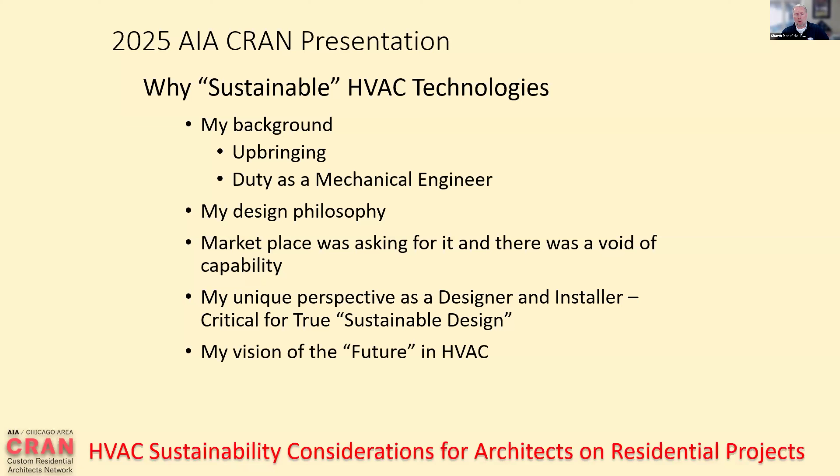I have a pretty unique perspective as a designer and an installer, so it allows me to bring that unique approach to the projects I work on, which I believe is really critical for true sustainable design work. And then I'm always looking to the future and trying to figure out what's coming next and how we can get out in front of those things to ensure that we have the best plan in place, so that when it becomes ready to be applied across a wider berth, we're ready to help apply that.

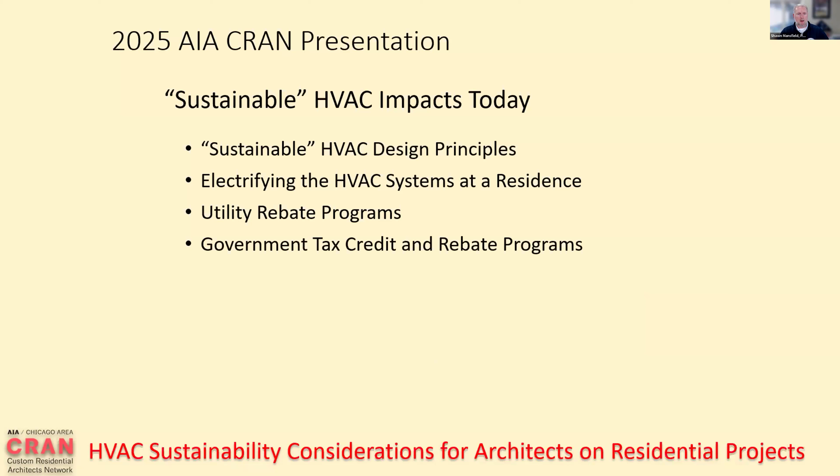So when I think about sustainable HVAC impacts today, some of the items I really think about are the sustainable HVAC design principles, electrifying the HVAC systems at a residence, utility rebate programs, and then the government tax credit and rebate programs that are out there for us to be able to apply to some of those sustainable design principles.

So when you talk about sustainable design principles, we want to work with the architects first and foremost to make sure that we can minimize the loads. We can always throw larger mechanical systems at things, but when it really comes down to truly sustainable, we want to make sure that the parts that I have to mechanically address are as small as possible. Whether that means solar shading, the direction the house points, the quality of the windows, the quality of the insulation, the envelope is a great starting place where we work together with architects to ensure that the sustainable design is as positive as possible.

A lot of energy modeling is being done by all your offices these days. This is nothing new, but how that house points, the overhang of the house, the trees, etc. all go into the amount of solar gain the house takes on, which affects the load that the house has. Next is finding the right approach for the project. Pick the right system for the job. That is important because there's lots of choices out there today, but understanding which one is the right one is very important. Picking the right system for the client. Not every client has the same wants to address the same load. So understanding what that is and how we can assist.

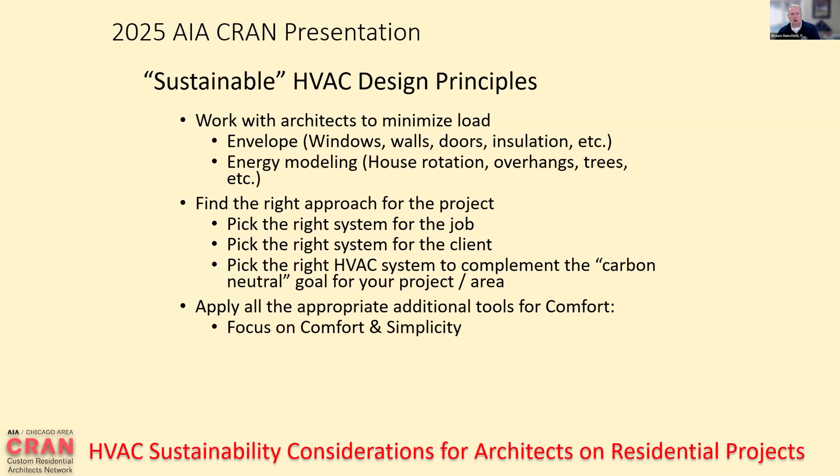Pick the right HVAC system to complement the carbon neutral goal for the project. And then next, apply all the appropriate additional tools for comfort. We've always had a focus on comfort at AA Service. We want to make sure that we're focusing on comfort and simplicity in designs. Those tend to give you longer life expectancies and less overall cost. We want to size the equipment appropriately for the project. You're actually trying to shoot to undersize when it comes to HVAC systems. Bigger is not always better. Most people believe it is, but in the world of HVAC, especially talking sustainable, bigger is not better. And then we want to apply humidification, dehumidification, fresh air and filtration to improve comfort as well.

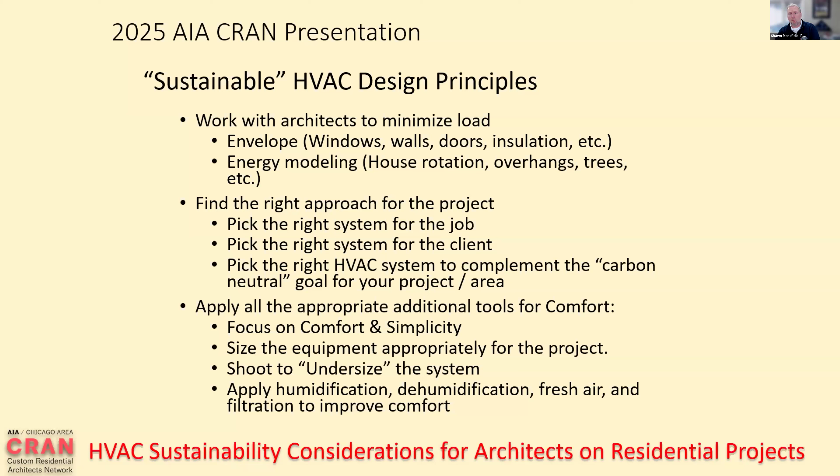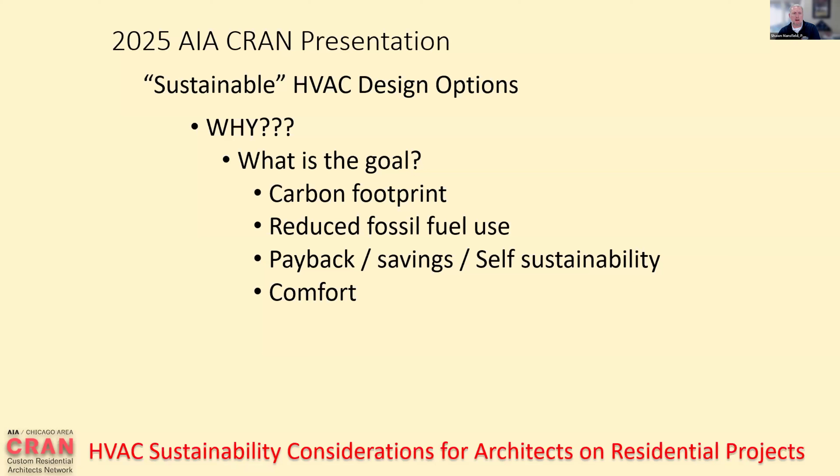So, why are we looking to do a sustainable design is an important question that we always have to ask. The first question to ask is what is the goal? Why are we talking sustainable design on a particular project? Does the customer look to be carbon footprint neutral? Do they just want to reduce fossil fuel usage? Are they just interested in payback, savings, self-sustainability of their systems? Understanding those versus comfort, and which one is most important to a customer, can really help us determine the right sustainable design for a project.

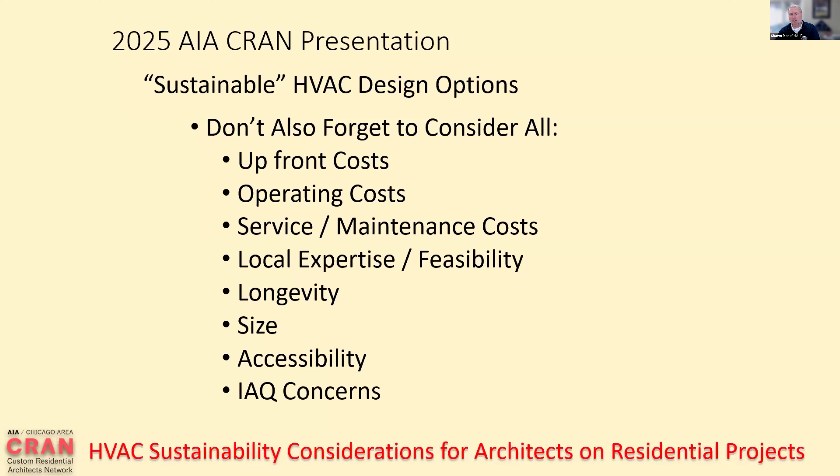But we also don't want to forget to consider all these other items too: the upfront costs, the overall operating costs of those systems, service and maintenance costs, local expertise and feasibility to apply those sustainable designs in a particular area, the longevity of the equipment, the size, shape, and location of the equipment, and the accessibility of that equipment once it's installed. And then finally, do we have IAQ concerns that we need to either figure into the design or create side applications for to address them?

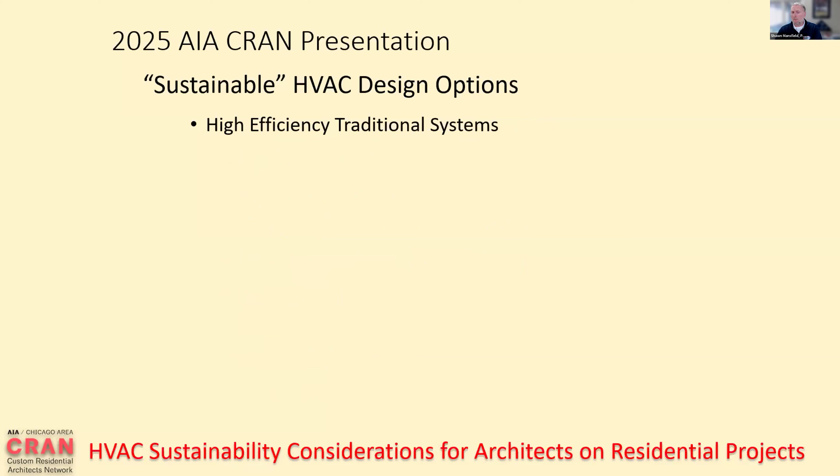There's a lot of different ways that you can apply sustainable designs today on the HVAC marketplace. A traditional way of doing it is a furnace and air conditioner. They certainly have some very high efficiency traditional systems that are out there today. They're kind of your good, better, best. They're going to be your good level starting point for someone looking to do a sustainable design.

There are other ways to heat and cool in our area. Certainly radiant heating systems paired with high efficiency boilers are another great way to create a very sustainable design when it comes to no moving air in the house, that you're just using the radiant floors to heat. But at some point we still need air conditioning. So it tends to be a duplicitous approach where you also have to put air conditioning systems in that are separate from your heating.

A very big way of doing sustainable designs that we've been involved with over the last 10 or 12 years has been air source heat pump systems, variable refrigerant flow systems. These provide for the opportunity to use more electric power to do your heating and cooling than gas.

Certainly geothermal is a key word that's out there that many people recognize. Geothermal systems use the earth itself to be a battery to allow us to store heat from the house for one season, to pull that heat back out from the earth in another season, to try and really minimize the amount of energy that we use. And there's still brand new technology to come. There's always new developments going on in the industry when it comes to the best ways to create new sustainable designs.

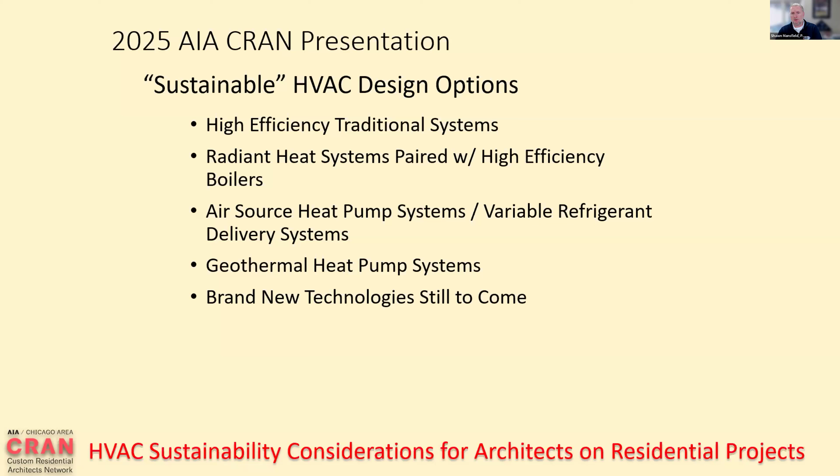So electrifying or hybrid, which one and why? These will be some things that we can talk through during the breakout, the future Q&A session, and just kind of talk through why we choose to do one versus the other. I've got some slides I can share when we get into Q&A in regards to some of these ideas, but there are two different ways that you can go. Many customers today talk about wanting to be able to fully electrify. They want to get completely off the gas out of their house. Those things are great, but there's a lot of things that go into the how when it comes to those applications.

For someone who's looking to just do more than use natural gas, the hybrid systems that are out there today, which use air source heat pumps to do both heating and cooling, the same job the old air conditioner outside used to do, are opportunities for us to come up with a hybrid where, depending on the local utility costs for electric and gas, we figure out that sweet spot where we go from using the electric heat pump back to using the gas. Maybe that's 30 degrees, maybe it's 40 degrees, maybe it's 20 degrees. It's a microeconomics problem for any location where you apply it. You have to figure out the utility cost break where it makes the most sense.

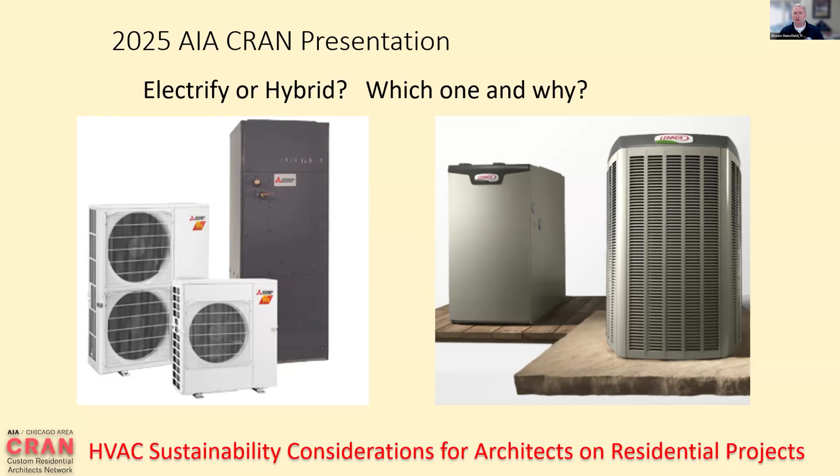But most of the manufacturers today are coming up with software that can help you make that decision and figure out exactly when it's the best place to use one of these. Certainly going to a hybrid is going to be less expensive than going to an all-electric or going to geo. So in a good, better, best, it can give you a lot of the opportunities without a lot of the cost, but certainly doesn't get you to the lowest carbon footprint. Any heat pump approach is a good option for looking to do sustainable design.

Some of the questions that I typically get asked that we can go through later are, how can I go fossil free? How can I get rid of the gas in the house altogether? How do they look and sound? Special considerations for installations when we apply these systems. When do you switch over in an electric or hybrid system? When do I know to go from using gas to using electric or back and forth? Is it automatic? Can it just be set up in the thermostat?

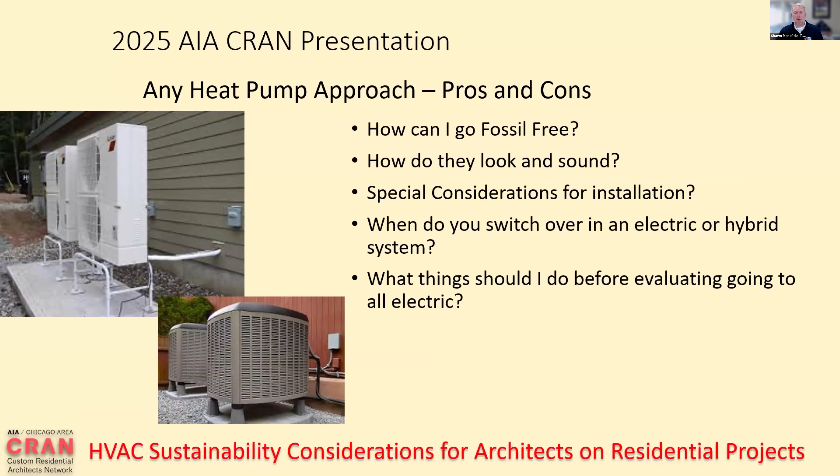What things should I do before evaluating going to all electric? And then also along with all that is understanding the different items that are out there to choose between. For your full electric approach, there are a number of pros and cons. Do I have enough electric panel to support?

That's something that Garrison's going to speak to a little bit during his presentation. Will the air temperature feel different in the house if I go to an all-electric approach? The answer is definitely going to be a little bit, but is it enough to be an issue for most? Probably not. Do I do one large system or a bunch of little systems to replace my existing system? All these things are opportunities that are out there when it comes to trying to fully electrify a house.

Do I go ducted or ductless? I know I'm talking to a lot of architects in this seminar today, so most of them are not appreciative of things being hung on walls that aren't art, but they are certainly options to be discussed with customers who truly want to look at the lowest cost and highest efficiency systems that can be applied, and those are units that don't have ducts connected to them.

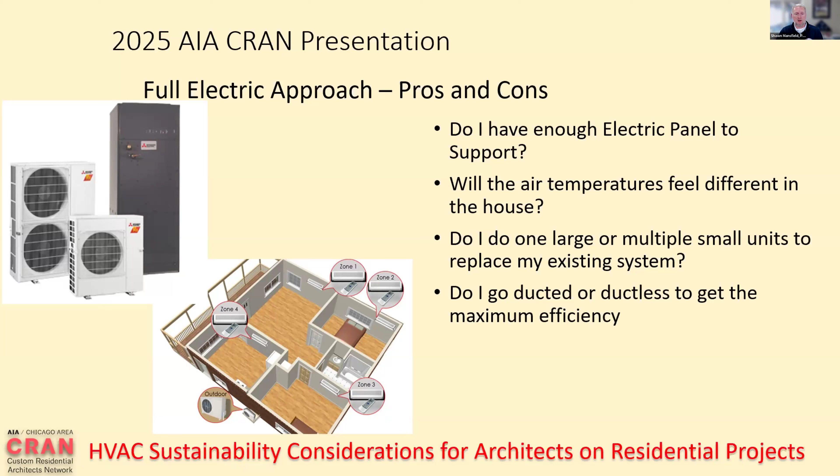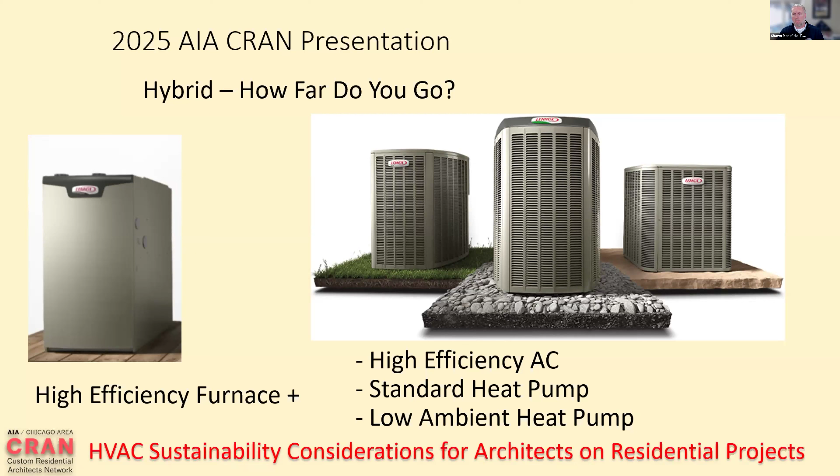So how far do you go? Again, for the hybrid systems, high efficiency furnace, you can either use a high efficiency air conditioner to get you a little bit of bang for your buck. You can go to a standard heat pump, which gives you a little bit of cross application of electric versus gas. Or they have the new low ambient heat pumps that are out there today that run all the way down to minus 20 degrees outside, and can really help try to run more electric and less gas before you have to switch over. Ultimately, though, for most of these hybrid applications, at some point you run a little bit of gas. And so it's different than going to an all-electric, removal of fossil fuels from your home.

When do I consider geothermal? Certainly geothermal is the highest upfront cost option, but it is the lowest carbon footprint energy saver out of all the applications. During the Q&A, I've got some slides I can show to that effect, but every time that you're doing these things, there is no one answer for any one design house, because the microeconomics of Chicago are going to be much different than a house on propane gas in southern Wisconsin.

Everyone's electric costs are different, everyone's natural gas costs are different, or propane costs are different. Or even on the East Coast, they're dealing with oil being removed and going to electric systems out there. So it is a microeconomics equation anytime you talk about sustainability and what system is best for a particular area. For geothermal, do you have yard or acreage? Do I have a yard space or none? Do I want the most efficient system out there? And a lot of times that's why people look to the geo systems.

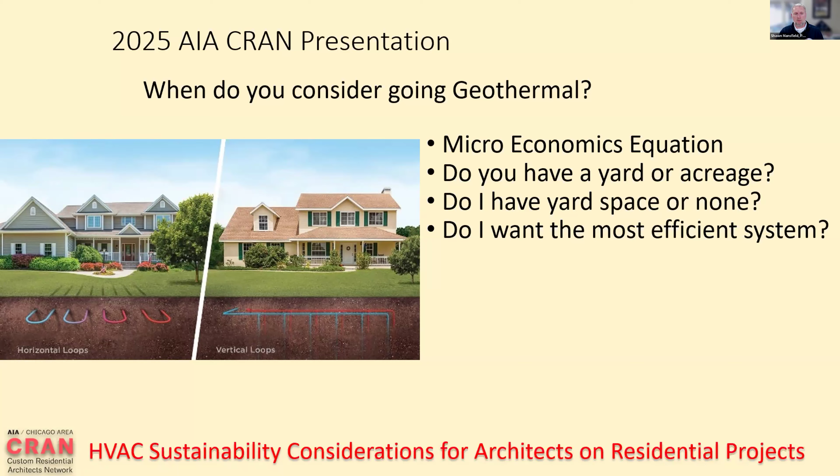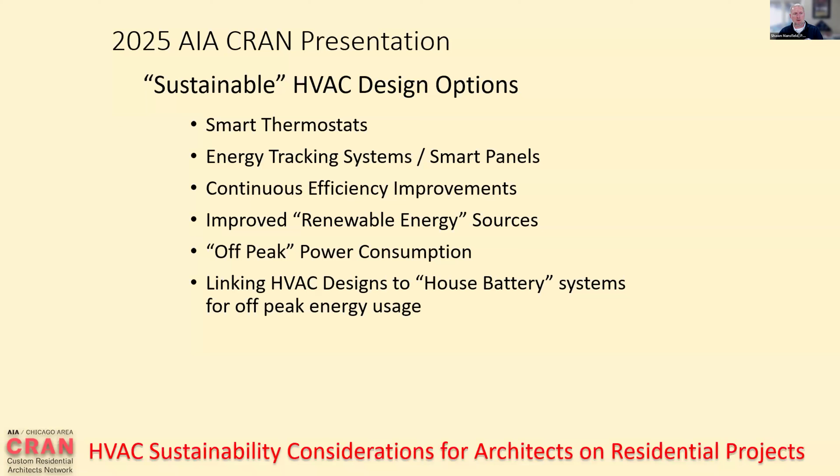So sustainability, other questions we get into: smart thermostats, energy tracking systems, smart panels, continuous efficiency improvements, improved renewable energy sources. Can you buy your power off peak and use that? That's again some of the stuff Garrison will talk to. Linking HVAC designs to house battery systems for that off-peak energy usage. All those things allow sustainable HVAC designs to be paired with other sustainable components within the house.

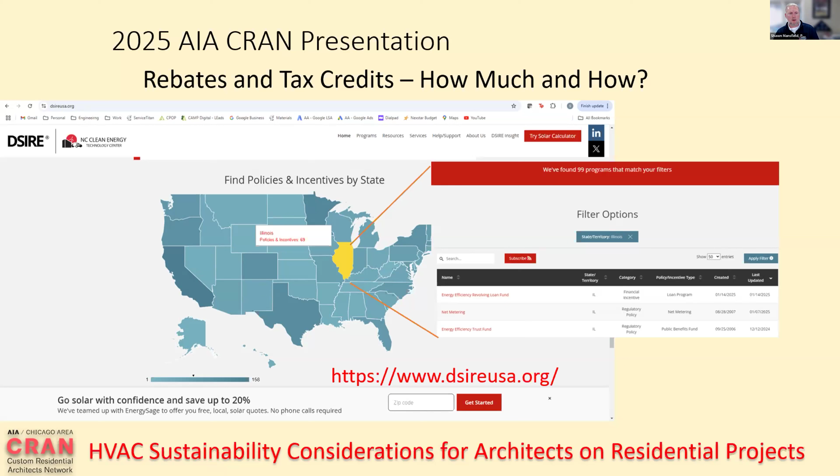One question that always comes up is, is there a great place for us to find out all of the things that we can look to get rebates and tax credits? This is a great website for that. Of course, always be careful when Googling DSIRE USA. So try to get the address correct. It can get you into weird places if you don't. But www.dsireusa.org is a great site. You can click on the state you're doing your work in, and it'll list for you all kinds of different programs that apply for sustainable designs, where you can find grants or credits or other things that might help your end user to get some money back for going a particular way.

Lastly, too, talking about the local utilities and understanding what they have. ComEd locally has rebates for heat pump systems and geo systems that are quite substantial, that can help to offset some of the costs associated with those. So that's kind of a basic overview of the items that I'm happy to talk about through our Q&A session. And hopefully I've addressed a number of the thoughts you already had in regards to questions. And I look forward to speaking a little bit more in the next few minutes when we break things out.

Thanks, Sean. That was great. So Garrison, interesting to hear how you add to the conversation. Yeah, sure. I will jump right in here. Should I start sharing? Is that now a good time? All right. Let's see here. Sorry, getting this pulled up.

All right, a little technical difficulty here. Okay, take your time. I know you guys have worked together in the past, so I'm glad we were able to have two people that have done work together for this.

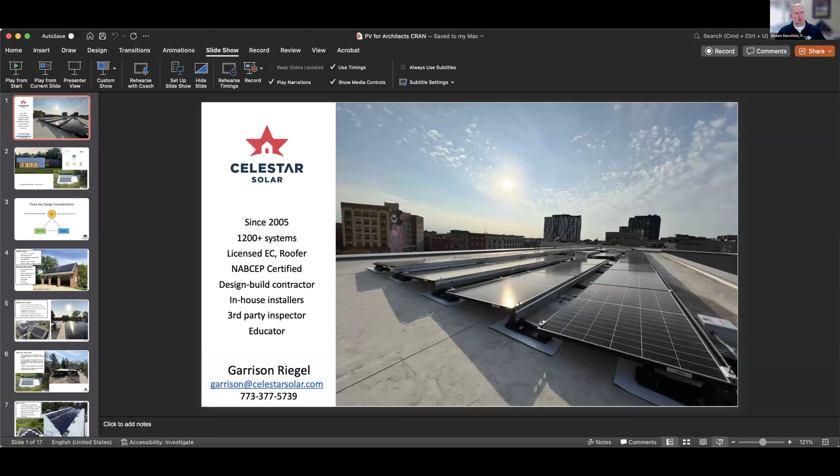Celeste, there's a great question in the Q&A while Garrison gets started, asking about they use Revit and what energy modeling software gets used. Generally, the energy modeling is done at the architect level, so I'm not actually doing that. Do you have a good suggestion on that? Me? Yes. Do you guys do energy modeling at your office, and do you have anyone that you've worked with on that? We use Revit, but I feel like we do ResCheck rather than energy modeling, but John, I know, is on here, so he can maybe answer that better.

All right. Okay, well, maybe while he's typing, we use ResCheck. We also use a plugin to Revit for modeling as well, which is becoming easier progressively. It's a familiarity factor, I feel.

All right. Can everyone see my screen here? Do you see some solar panels? Yes. Great. Cool. Perfect. All right.

Hey, everybody. Thanks so much for having me here. Happy to talk with architects. I've been in solar a long time, since 2005. I like to say since before solar was cool. And the industry has been pretty rocky over the last 20 years.

And I gotta give credit to architects. Through some of the leaner times when subsidies weren't around, or there's uncertainty in the marketplace, architects were still incorporating solar designs into their projects. I and previous colleagues of mine have a lot of relationships with architects in the Chicago area, maybe some of you on this call today, that really helped keep solar going in Illinois.

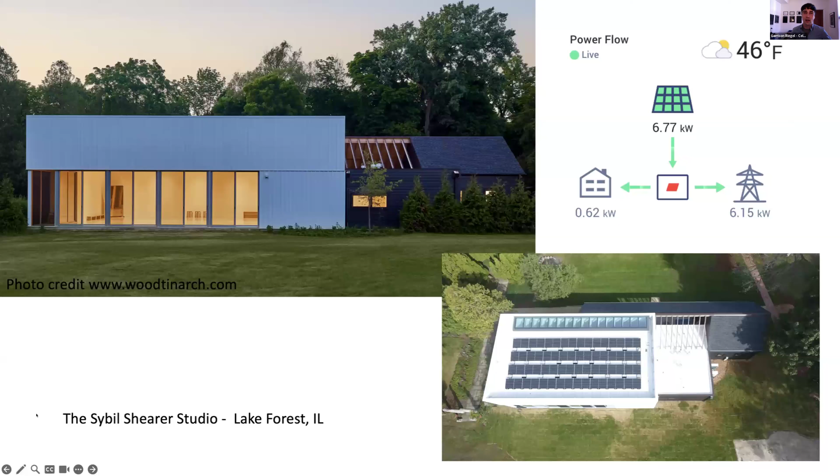There we go. All right, so here's another one. This is a project that Sean and I worked on together. This is Goldberg General Contracting and Woodhouse Tinucci Architects. This is the Sybil Shearer Dance Studio at the Ragdale Center in Lake Forest. And I thought this was a really cool picture. I took this off their website.

But you know, it shows this really beautiful building that has a bunch of sustainable features, and there's a big solar array up on the roof. You can't see it at all, of course, but it is up there humming along. I was checking it today, and you can see that little power flow chart in the upper right-hand corner. That's showing the power flowing from the roof into the building.

And that building is heated with a heat pump that Sean and his team put in. And you can see that the whole building is solar powered today, and there's power flowing back out to the grid. So it's not a super cold day today. It's 40 something degrees out. So maybe the building doesn't need a ton of energy.

But I thought it was pretty neat to see that this building is 100% solar powered today, and it's heated with electricity. So I thought that was a nice example to show you guys. And then on the lower right-hand corner, you can see the solar array up there, which I think has a nice grid look to it.

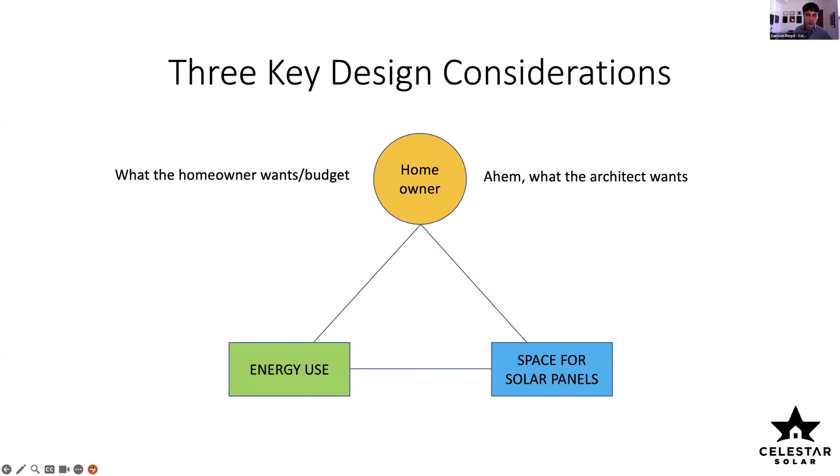And then of course, I know we're talking to architects here, and I have had the pleasure of working with some architects over the years that also have thoughts and opinions. So we don't always get to put panels on the front of a house because maybe the architect doesn't want them there, even if the homeowner does. I've had situations like that come up where the homeowner doesn't care, but the architect does, which I think's sort of funny. But we basically find a blend of these factors to come up with the best system design for the specific application.

So when we're looking at a solar system, we are constrained by the size of these solar panels. There are custom panels out there in the world, but generally speaking, the truly tested and reliable products are basically all these rectangles. They're about 3.5 feet by 6 feet. So that's 21 square feet per panel. They're not squares, they're not circles, they're not triangles, they're rectangles.

Most panels are between 400 and 500 watts each. I've installed systems on homes in Illinois with as few as 10 panels and as many as 150. And that 150 panel system didn't actually meet all of their energy usage. We just ran out of roof space. It was a pretty big home, so usage really varies. That home that needed maybe 200 panels was right on the lake. It had huge glass windows and 5 air conditioners.

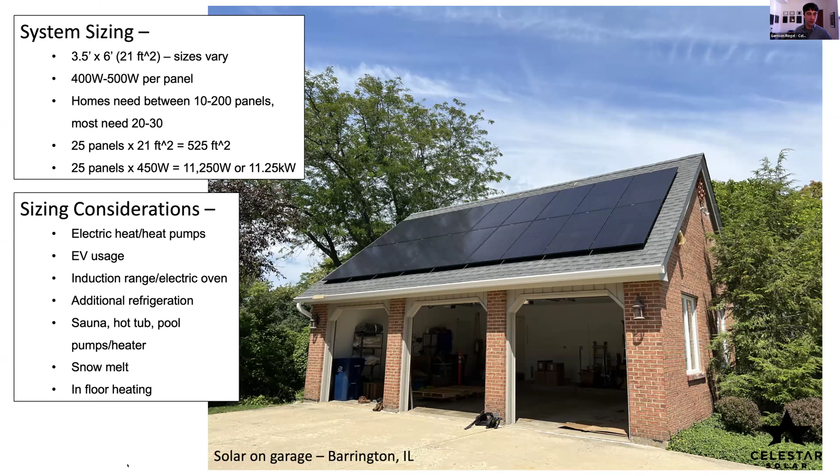So again, in terms of spacing, it does differ if you have a pitched roof or a flat roof. Flat roofs are great, where my old boss used to call Chicago the Saudi Arabia of flat roofs, which I thought was pretty funny. I think a nod to the oil industry there, but here we have a ton of flat roofs, which allows you to hide a lot of the solar. So if that is something you care about, having a flat roof design can really keep things low profile and keep the solar out of the way. But you do need more roof space with a flat roof.

When you're thinking about a good roof for solar, you want one that has minimal vents, minimal skylights, and minimal dormers, and ideally doesn't have a lot of shade. So I do get presented with designs sometimes. These homeowners really want solar, or maybe the architect wants solar, and they show me the design and it's just covered in dormers. And that's fine. I think some people really like that aesthetic. That's great if that's what you or the client likes, but they're just probably not going to be a good client for solar, at least on-site solar.

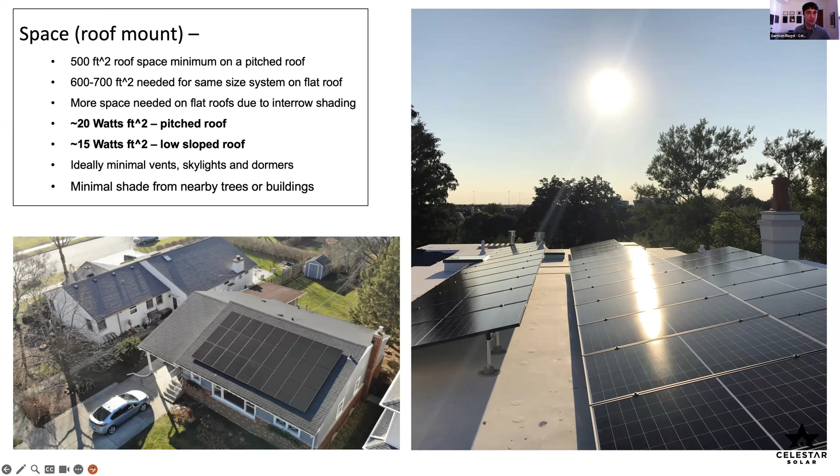So unfortunately, you can't fill the entire roof with solar panels anymore. You used to be able to, but now we have the fire codes that require setbacks from the ridge and gable ends of a roof. So you need a 36-inch pathway at the ridge, and you also need 36-inch pathways on each gable end. The more modern codes, so 2018 and 2021, that pathway at the ridge is reduced to 18 inches if the solar is less than 33% of the plan view roof area.

And then you only need a single 36-inch pathway from eave to ridge on one side of the array. If there's a hip roof, you could have that 3-foot pathway shared on each side of the hip. But there are pathway requirements. So, I know that's all a little bit technical maybe, but basically you can't fill the whole roof. You need space to walk around the array for firefighter activities.

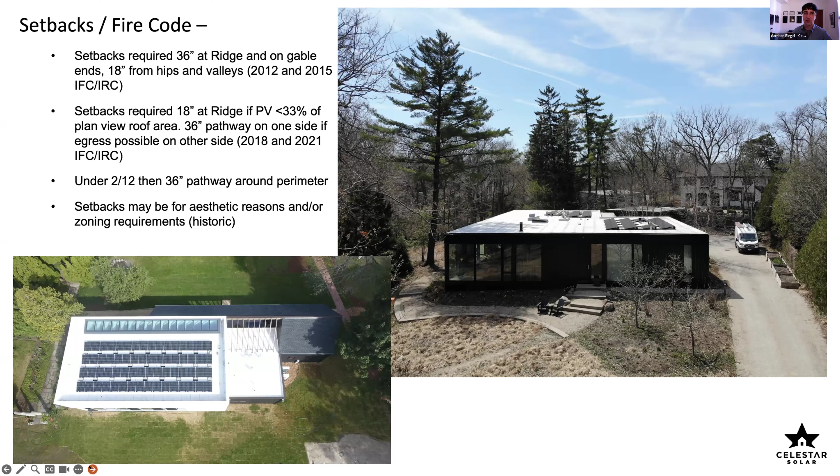So, sometimes you can't fill the roof for fire code reasons, and sometimes you don't want to fill the roof because you want to have a certain aesthetic where you might not see the solar panels. Oh, and then of course zoning too. Many of you are building in historic areas. That's another reason that you might want to hide the solar panels, is that zoning rules just don't allow it.

In terms of design criteria, the solar panels are very light. They're less than 3 pounds per square foot. When you get into a flat roof system, the weight can increase because we're not always penetrating the roof, like mechanically fastening the array. We might be doing a ballasted system, so we're using concrete blocks to hold it down. And that might increase the weight to 5 PSF or maybe even 7 PSF of dead load.

So you need to make sure the roof can handle that. But I've never had a modern roof fail structural engineering. So as long as the roof is built to code, it should be fine. The ideal tilt angle for solar is between 10 and 40 degrees facing south. The array can be tilted at a 5 to a 60-degree angle without issue. You just start to lose performance.

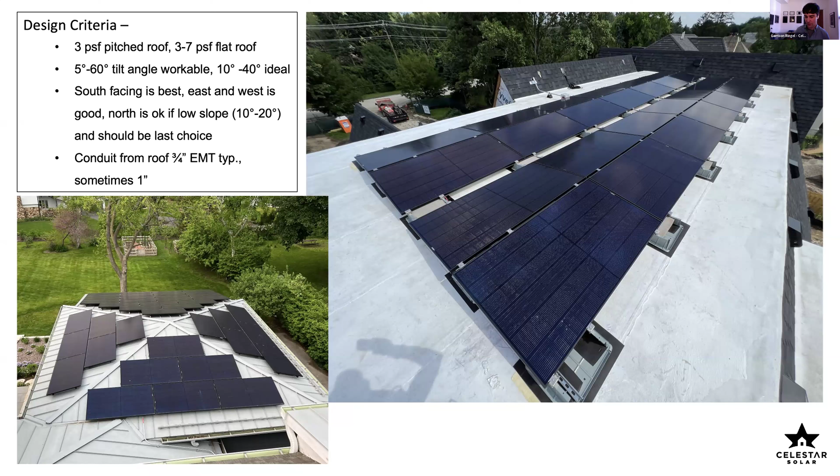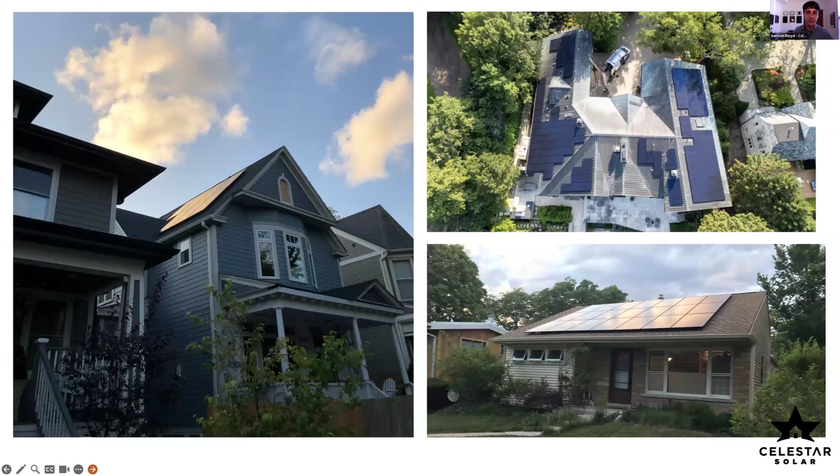There's just a couple photos. I just wanted to show different approaches to solar. These are all existing retrofits. We're kind of just working with the architecture of the building, and all the vents and skylights that exist up there. Ideally, again, we have these nice rectangles, but we can sort of modify the array as needed.

What's interesting about this array in the upper right is that the homeowners didn't want to see the solar, but we still fit like 130 panels up there, and you can't see this thing from the road. It just has to do with the architecture of the building. It's just how it's built. So there are ways to get giant systems on pitched roofs and still not see them, and that's a great example of that.

I wanted to show this one because it's a relatively small system. You also can't see this from the front of the building. But the architect gets credit for this. They were super communicative through the whole process. They made sure every single vent was out of the way. Even when the HVAC person put a vent in the wrong place, they had it moved.

So we end up with these nice rectangles. I think they're well-framed systems. I think they just look nice, but this took architect coordination. This happened the way it did because an architect was involved and made sure that vents were out of the way.

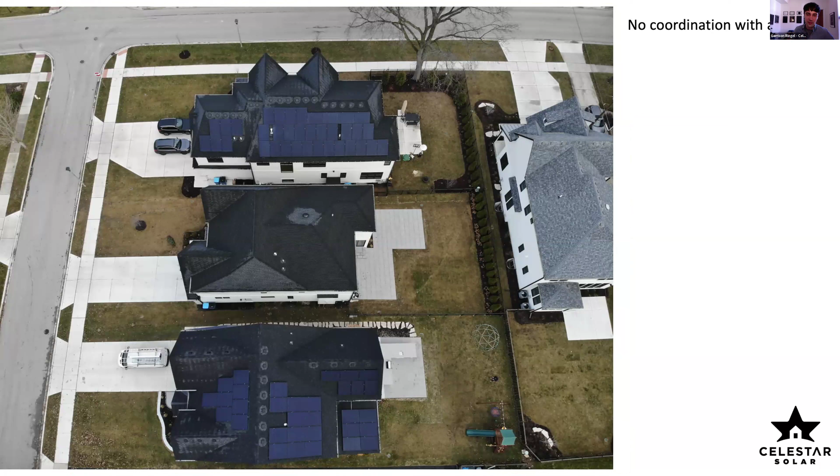These systems here, they came to me after the houses were built and wanted solar. And so the vents are kind of in the way, and we had to work around them. A little bit of coordination in advance could have got these vents in different locations and had a bit more aesthetically pleasing result.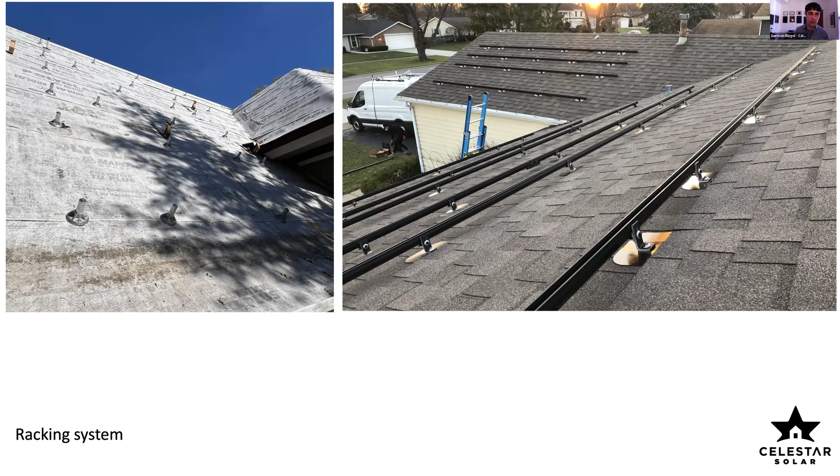I'm seeing a lot of folks these days want these composite plastic fake slate roofs, which are okay. They do add a lot of cost and complexity to the solar projects, and usually the roofer is going to charge a lot of money to flash these in. But we can use a post, and the roofer can flash around them just like they flash any other vent in a roof. So it's possible to work with them, but you really want to get a solar contractor involved early in the process to ensure that the project is successful.

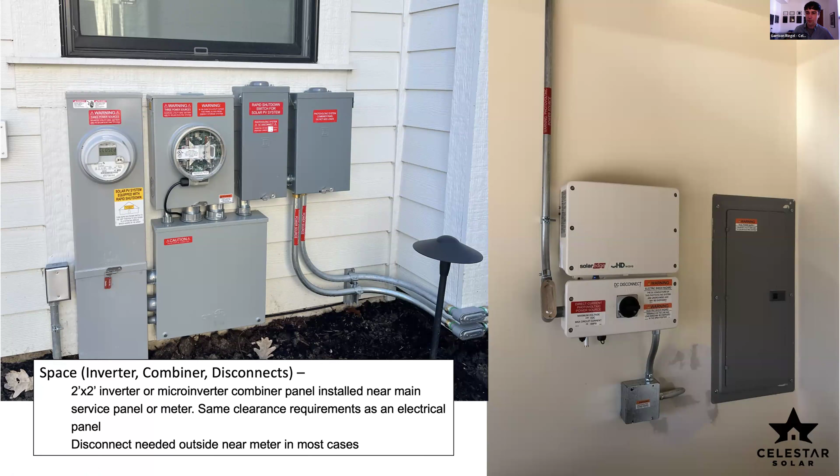There's a lot of equipment that goes with solar. It's not just panels. We have an inverter or like a combiner panel. There's disconnect requirements, which is often overlooked. To make a system look nice, we want to make sure that we plan for this equipment too. So having space in the mechanical room next to the electric panel and space next to the meter outside is helpful. And the bigger the system, the more space is needed.

And that space ideally for batteries is in the garage, like an attached garage, or in a drywalled mechanical room. You can put batteries outside, but they don't work so well when it's really cold. So best to put them in an attached garage ideally.

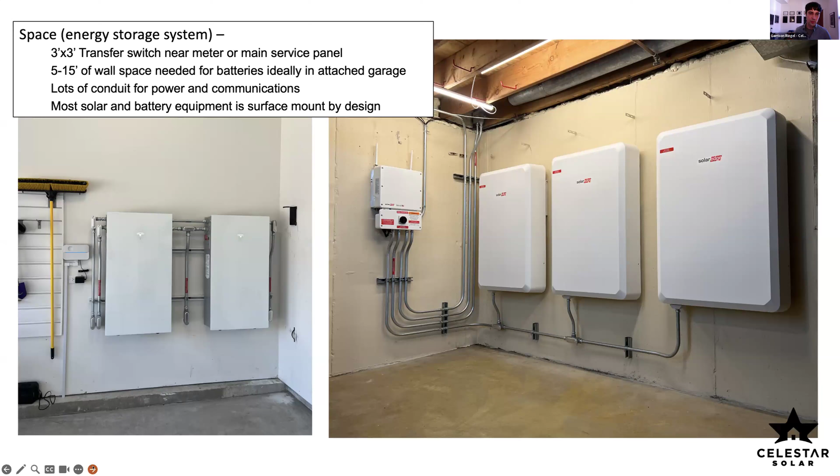And then, for a successful project, it takes three things: good design, quality components, and a qualified installer. That's a little pitch for myself. But it's not enough to have good parts. Design's fairly easy, but as you get into batteries, it does get more complicated.

A lot of people say they can install solar, and it's fairly easy, but there's a lot of ways to mess it up. So if you want a really good product in the end, if you're building a house, it's so important to get the solar installer involved early. I cannot tell you how many times I've had people say, "Oh, I'm just going to get the house solar ready." They have their project electrician run the conduit from what they think is the right place to what they think is the right place, and they didn't start at the right place and they didn't end at the right place, and they don't have as aesthetically pleasing a result in the end.

So if you are thinking about solar in a project, even if it's just solar ready, I would recommend getting a solar contractor involved to help make sure that project is successful when it comes time to put in the solar later.

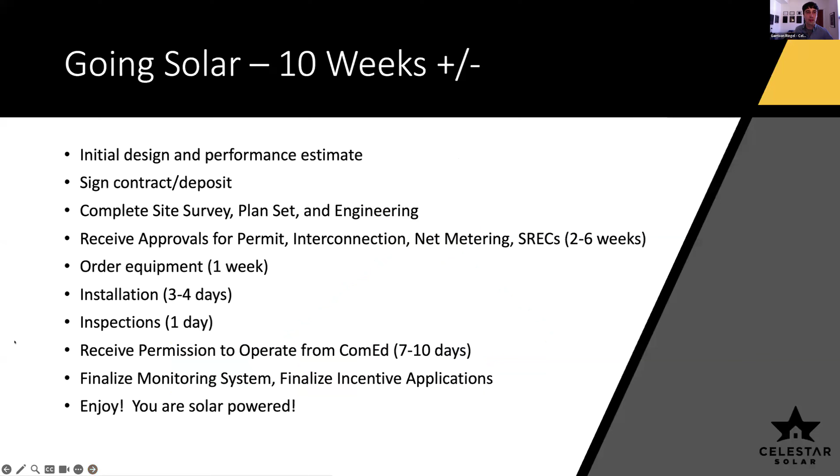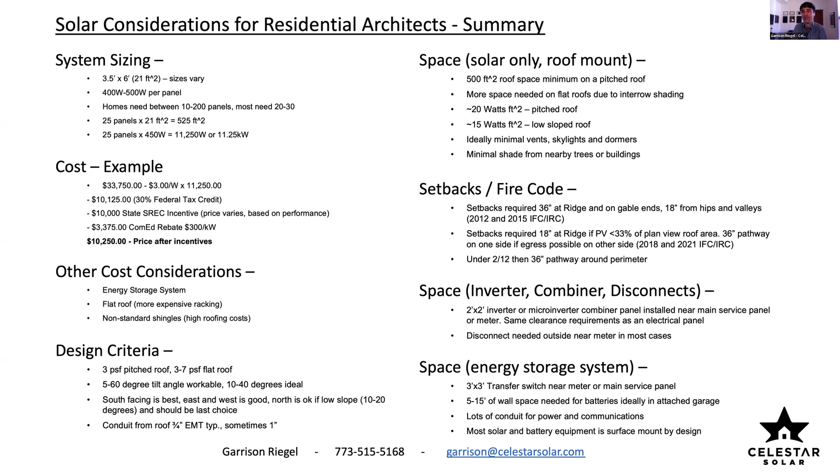So sorry, I think I talked a little long, but I hope that was helpful. And I'll turn it back to AIA. Thank you. That was super helpful. I was hoping to get some Cliff Notes guidelines, which you gave us a lot of, so that saves a lot of my questions anyway. Greg, do you want to start off with some of the questions that are in the chat? I know we're getting close to one, so as long as you guys want to hang in here, I'd love to get through a few of these questions. Yeah, without running too long. I think there's some good ones. And yeah, thank you both. That was great.

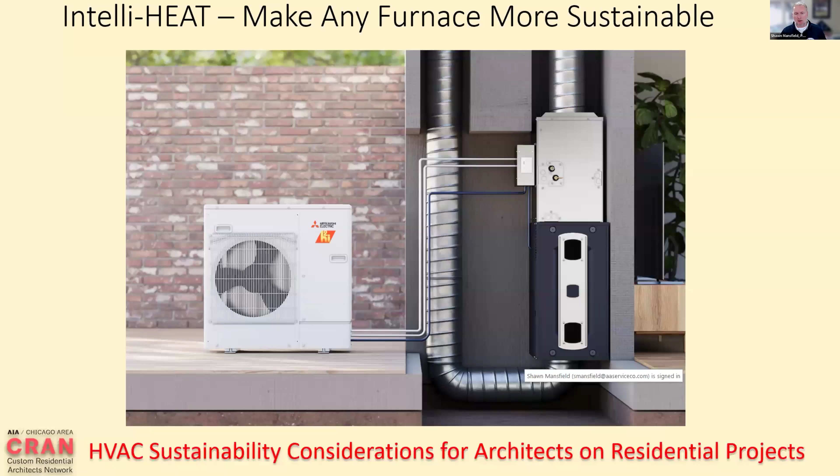Jumping into the first question, this is directed, I think, towards Shawn. Can you explain in more detail how a hybrid system works? Absolutely. I'm going to go ahead and reshare my screen. I had some time to pull up a few slides while Garrison was speaking. So a hybrid system is kind of your first step in the good, better, best evolution of energy efficiency. And what you can do today is a couple different ways. You can buy a complete new furnace, air conditioner, and outdoor heat pump to work together. Or there's a number of manufacturers like Mitsubishi who have developed just the coil and outdoor condenser that would replace a regular air conditioner and be mounted on an existing furnace if your furnace is in good shape, relatively new and already efficient.

A hybrid system really is a dual system. It uses an air source heat pump outside, which is similar to an air conditioner, but instead of only rejecting heat from your house to the outside, which is what an air conditioner does, a heat pump actually reverses that process and can pull heat out of the air and bring that heat back into your house and allow you to use it to heat through a refrigeration cycle.

So a hybrid system, like the one I'm showing here, would have a controller built into it where when the thermostat asks for heat, we've pre-programmed it to determine at what outside temperature it makes sense to use the electric, and at what outside temperature it makes sense to use the gas furnace. And so it would make the choice of running the electric heat pump when it's the most efficient and cost effective, and then switch over to gas when that's the most effective. In this case, it's all done through some initial setup settings. So the homeowner does nothing but set their thermostat to 72, and the controls determine the best time to go from electric to gas.

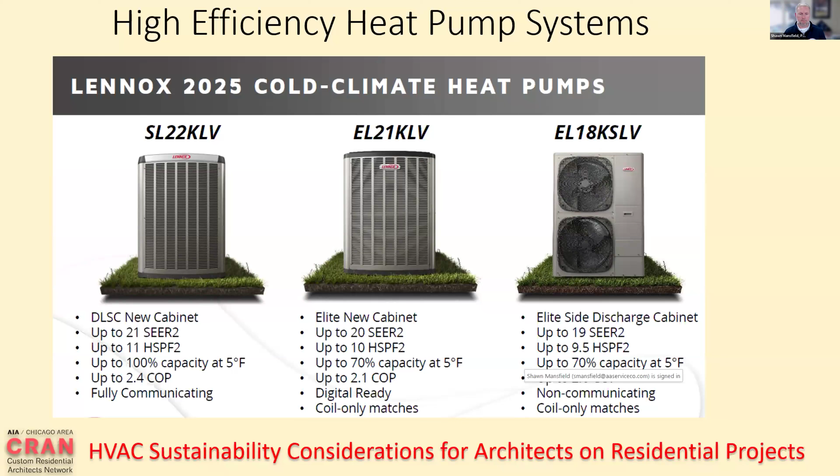Okay. Another one, this is, I think, geared more towards Garrison. The cover photo of your presentation with relatively flat panels is intriguing. What are the pros and cons? Any tips for maintaining the roof for leaves and drying out, etc.? And further down in the chat, there's a couple other questions on similar topics.

One being, how do you plan for a future solar panel install without any worries about compromising a roofing warranty? And then, examples of panel installations on historic structures, which I think you showed at least one or two of later in your presentation, Garrison. Yeah, sure, all good questions. Just starting with the low slope one.

So that one on Studio Gang was a 5-degree tilted array. We did that to maximize roof space or increase power density. A 10-degree array would have pushed into the fire code setbacks, so the 5-degree allowed us to get a larger system size. A disadvantage is that the panels will get a little dirtier, so you need to build a little more losses into your performance calculations. Snow might also sit on them a little longer. So those are the downsides.

On the upside, a lower tilted panel can't be seen, which is helpful for historic preservation. For houses in historic preservation districts, you can't see the array from the ground. If you can see it from the ground, it won't get approved. So a 5-degree tilted rack or a flat flush mounted panel is a good choice there.